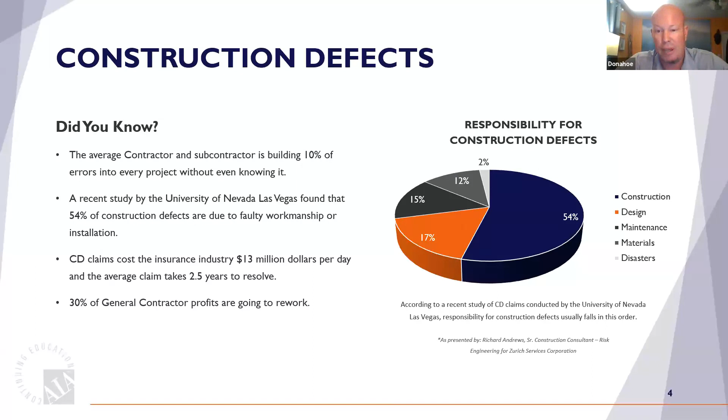So the world as a whole is trying to get leaner and more efficient at construction, and because of the COVID-19 scenarios in play across different metropolitan statistical areas in the United States, different technologies and platforms are being adopted to help flatten this curve.

Next slide. So our learning objectives today, and I have to move my little iconic imagery here.

A review of traditional photographic documentation will be teed off on quickly. We'll show what specs are kind of boilerplate and put into most of the Division I general requirements and most of the construction bid packages that go out on the street these days.

And then we're going to dive into the new stuff, new technologies and how they're being leveraged. And then we'll look at who's using these types of services. We do have a great panel today to help explore during Q&A how that's leveraged from the AEC or OAC team. Next slide.

So the traditional specification has always been included for at least the last 20 years. There's a cost, there's an allowance put in play per project to be allotted in Division I general specifications, and there's also a unit price breakout. A photographer is chosen based on their qualifications, or it's done in-house.

Sometimes, a lot of times, the specification is completely overlooked. But we are finding that now, these days, because of the ability to communicate quickly and the power of digital imagery and graphic user interfaces, these technologies are quickly coming to save us time and money in construction.

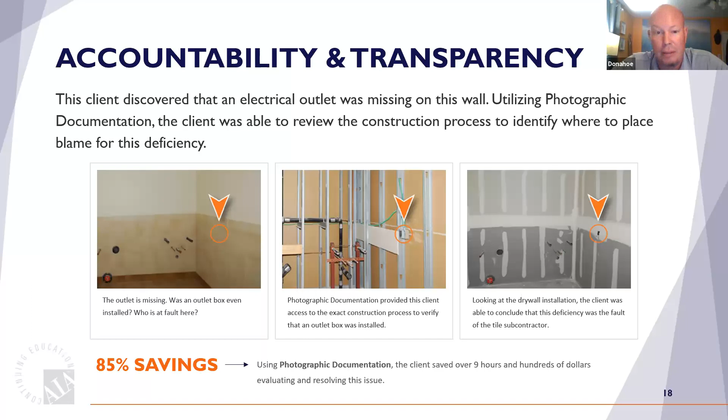So these might be arbitrary numbers, please chime in at the end, but we've put this information together over time from talking to folks in the industry. So you can read through and see hourly rates and apply those to what your firms do. Think about the amount of time spent trying to request and find information you don't have visual access to without driving to the job site or hearing from 3 to 4 or 5 people. Imagine the ability to save this kind of time by quickly coordinating and responding to situations that arise on all construction projects.

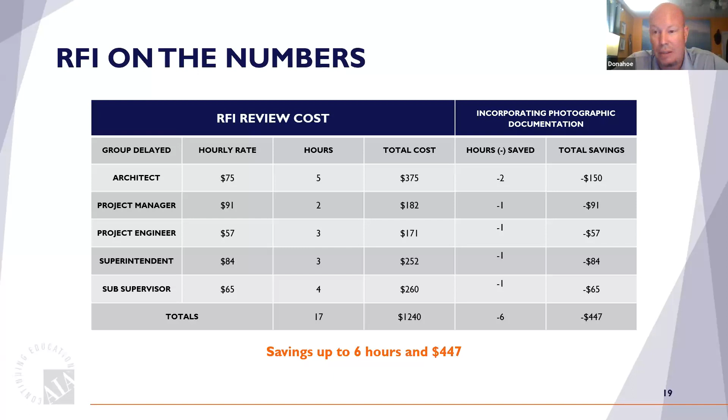Construction milestones. Capturing key construction milestones post-inspection and pre-cover-up gives you a long-standing memorialized record. It's true as-built information, not just record drawings, not updated redlined as-builts. It's true visual as-built information. These days, we're calling it reality capture.

The mechanical, electrical, and plumbing stage is a critical stage of all projects. The ebb and flow of these change constantly. Placement of material and material substitution come into question, and then rework once drywall installation goes in, or ceiling tiles are dropped, or hard ceilings are put in place—especially on the interior sides of busier facilities like hospitals, laboratories, and Department of Defense or government related projects. This is very critical, but for the life cycle, for the people that inherit this asset, someone can walk into this project from an ownership or facility management side, pull out their smartphone, click through imagery, and be there back in time as if they were there the day it was built.

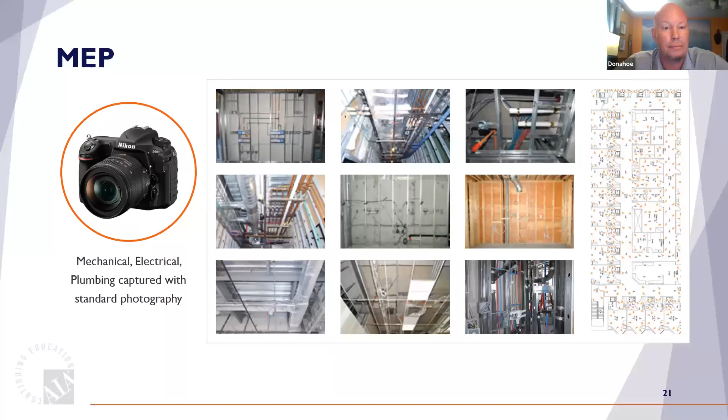Immersive technologies—immersive is like the BIM word. Building information modeling means about 1 million different things. Well, immersive technologies are scanning equipment, whether photographic or laser scanning, and it's constantly updating and changing. This is moving into the world of supplementing the photography. The resolution is getting better, the metadata is getting better, it's getting easier to capture. Takeoff data is getting easier to measure and share in terms of point cloud information that hides behind the image. This is really a big part of the emerging world of technology we're talking about.

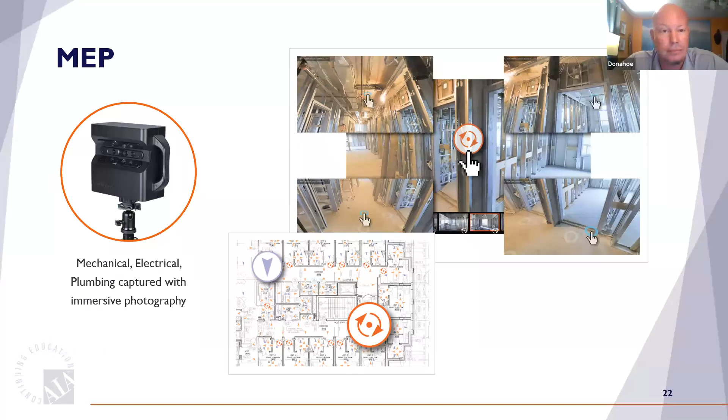So we kind of hit on all these. The MEP work—just to be able to instantly know what you got, where it went, where the materials were placed over time, how it was put together, but also for future renovations and additions onto a design team that I'm speaking to today. If you could walk into a room or space and know that entire space that's concealed, and you have to do a renovation, then your need for not knowing if the as-built information is accurate according to drawings is easily overcome by being able to visually see where everything is—just taking off the drywall, the insulation, the ceiling tiles or hard ceilings, even the outdoor utilities, the connection points—just see that visually and make quick decisions on future renovations and additions.

Next slide. Pre-slab concrete work is always something that if there is a hiccup or a change order, pulling in X-ray equipment to do some kind of coring or modification post-pour is time-consuming, expensive, and usually happens after hours. With traditional overlapping photography in the new era of photographic tech, you could at least make a decision based on this imagery tied to your floor plan of where what is. In the advent of new tech emerging, there's actually measurable photography now that can tell you exactly where something is, so you can step away from the old world of having to X-ray for coring or checking structural integrity of your slabs.

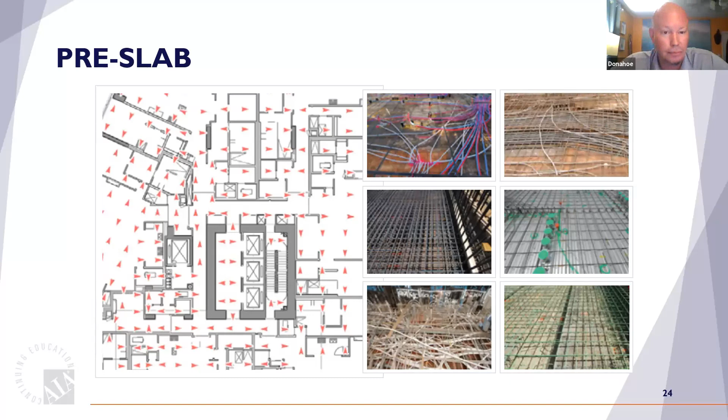So one thing for sure—and a lot of concrete companies like the accountability here too—is just the oversight to placement of rebar and waterproofing. This really helps validate and save the project lots of money down the road, especially if you can control it and correct it during construction while the folks are there on site.

UAVs, drones—they're amazing. The ability to capture visual information related to every element of your project. You can do easy mosaic mapping now, creating a three-dimensional model you can plug into your design software packages, dropping the design into a landscape you haven't yet built or got approval to go vertical with. But it's also leveraged daily. Instead of just a boots-on-the-ground photographer taking overlapping pictures, you can document anything above 4 stories, look straight in the window, monitor elevations and waterproofing details, do roof inspections during construction and at completion, and civil site studies measuring very accurate data of cut and fill and other relevant aspects of yard pipe and utility runs.

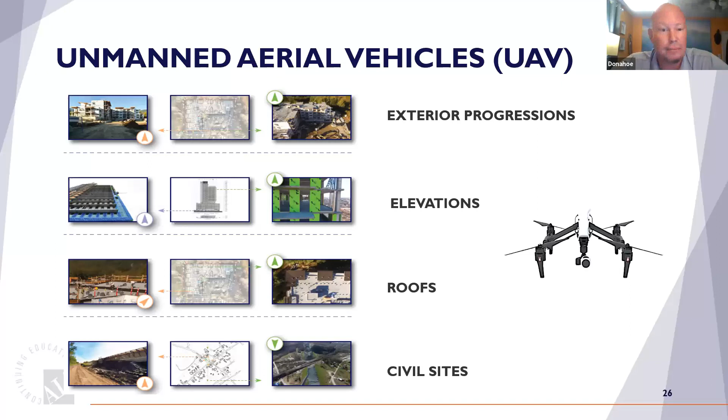So I'm speaking to the benefits as we look at this imagery. Everybody's fascinated with UAVs. There are a lot of folks out there still wild-westing it, flying illegally, and there are liabilities associated with that for both owner and GC. But drones are definitely a technology that's here now. They capture far more information than going up in a helicopter or a Cessna to do monthly flyovers, improving safety and minimizing risk for inspections during and after construction, like curtain wall or waterproofing installations. Not as many people have to hang over the side of a building anymore to do these kinds of inspections.

Here's a great example, I believe this building is 12 to 14 stories tall. You can digitally zoom into these images, and this is a static slide, but you can see the sequence of images across the bottom showing how the waterproofing is in play. You can zoom all the way into the corner of those windows and see a hairline crack. The power of the UAV world is here, and it's proving very valuable.

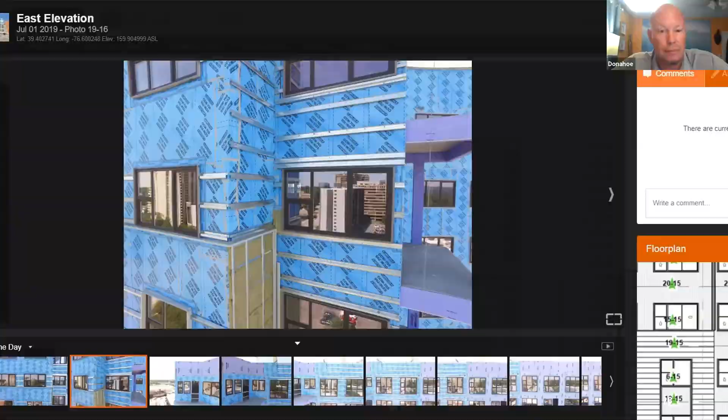There's also the ability to zoom in, whether you want to inspect a roof or take a look at utility runs now or in the future once they're covered up. The measurable data is very accurate—you can get accuracy within a few millimeters depending on the drone's flight path. The sequence of images below are all navigable. You can mark these images up, share them, and use them across your entire project team.

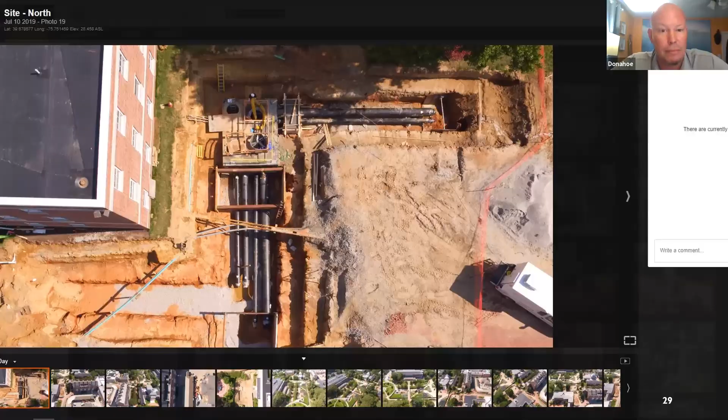I touched on this a few seconds ago—the three-dimensional world captured from the same flight. While the bird's in the sky, there's so much visual metadata that can be captured, it's absolutely amazing. You can zoom all the way in on this. This is reality capture from a drone UAV perspective, showing the landscape of this hospital, I believe. You can zoom around, spin it on top, and even drop it into Revit or Navisworks and plug in your add-on building to see how it would look across the landscape.

Webcams are everywhere now—you can't drive down a street without seeing one. In construction, they're most notably great for tracking overall progress, and the technology keeps getting better. You can read a license plate from 100 yards with some of the tech out there these days. You can make this very shareable, and also mark up and annotate these images with call-outs.

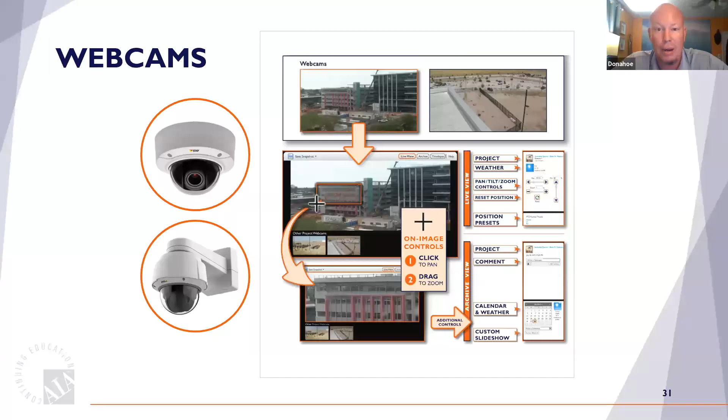With some of the new cameras out there, you get the power of one camera that would otherwise take four cameras to capture the visual information needed for different archival areas of your project coming together.

Real-time oversight lets you look at this on your phone these days and see a live feed. It's obviously a great marketing tool, edited at the end—you see this in a lot of offices showing their projects coming together. It's also a great way to capture historical data, especially for project overruns. If you have a 16-month project that went 24 months and want to go back in time, this will tell you a lot.

One thing that's really evolved in the visual world, because of the ability to condense data, is understanding—especially for facility management and vendor training. Having a third party come in and do it is a huge benefit to the owner, because all this information can be saved in the cloud. A facility management team member can pull up an edited, chaptered file on a specific piece of equipment and learn how to use it right there on the spot while standing in front of it. That's very powerful for knowledge of how to use your assets, non-static equipment, and also for emergencies.

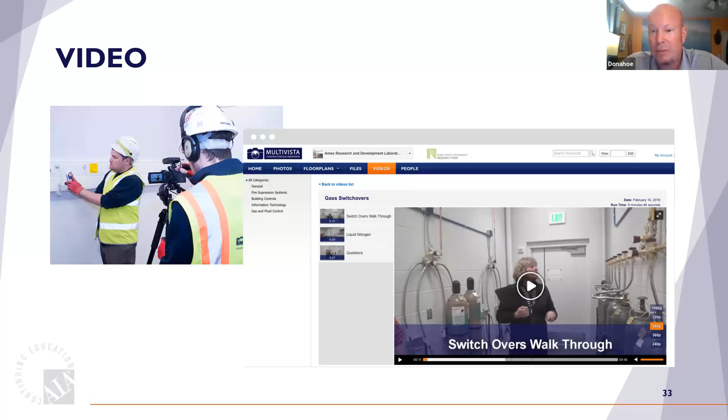So: facility management videos, training videos, overall construction videos, and inspection videos. Video information can now be condensed, saved in the cloud, and associated with a location on the drawing. Video has really changed from just being a webcam in the sky to a perfected tool for managing facilities over their life cycle.

So go ahead and look over these defects. These are the most common. This was highlighted by Zurich Risk Management several years ago. They're one of the largest insurers of construction risk in North America. But everything seems to be water related for long-term defects, whether it's water coming from the outside in or water coming from the inside and trying to make its way out.

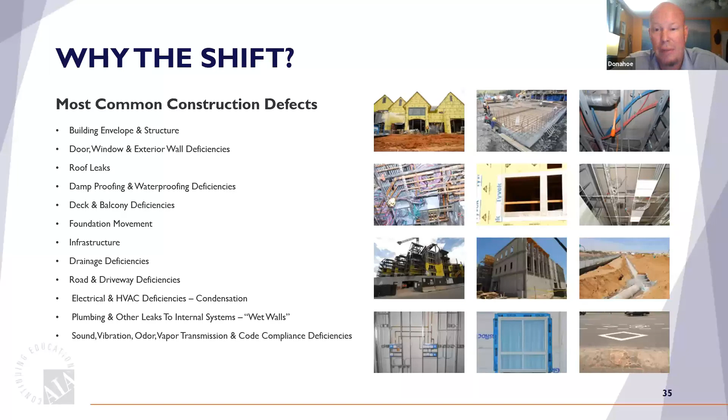We're going to show one sample here in a sequence of images how you can drill in on a non-static platform and cut the issue off at the pass, not only just by your envelope engineer using about 10% visual captures, I think, is what they capture.

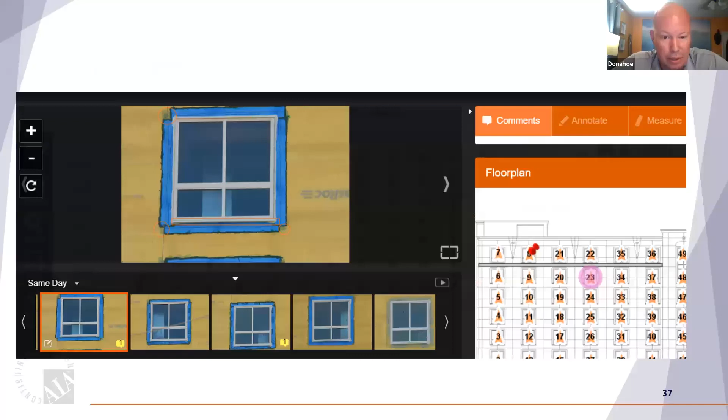Here you're going to see documentation of every single close-in on this hotel, and every single one of these arrows is pointing at a window. Someone noticed an issue here, they flagged it, and were able to mark up on the next slide where the weep holes were being filled in. If you're proactive with this kind of stuff and it's available within 6 to 24 hours, you can offset the future costs of your walls filling with water, mold infiltration, and other issues that would evolve from this.

So the new specification in photographic documentation is emerging, really focusing on an index system that's able to navigate, that you're able to navigate on the actual drawings. And it's accessible on an online interface, and it's shareable. So we're talking about continuity and data capture, visual information.

We're making sure it's shareable, and making sure that it's overlapping in detail. Everything is time-stamped by date per the old spec, but it's just a lot more visual information that's very comprehensive, which is true as-built information and what is emerging into true reality capture information.

So if you combine the inspection-grade, high resolution imagery to capture actual conditions throughout the life cycle of the project, you are capturing these milestones. You are telling the true story of the as-built conditions of your asset. And this information, again, is shareable and accessible on any kind of smart device these days. The simultaneous communication and collaboration is a game changer for cutting off defects, RFIs, verifying change orders, and lifecycle management.

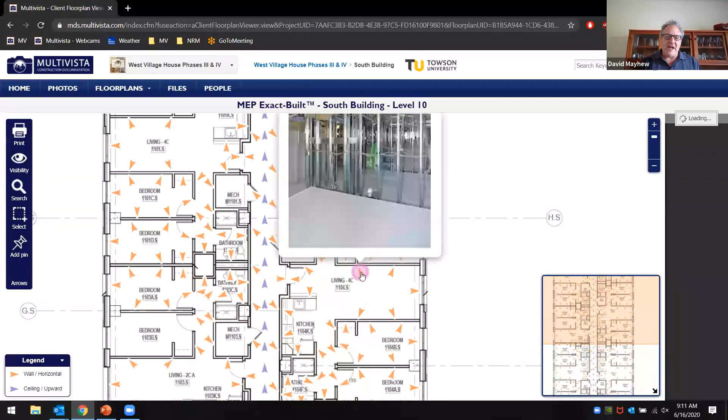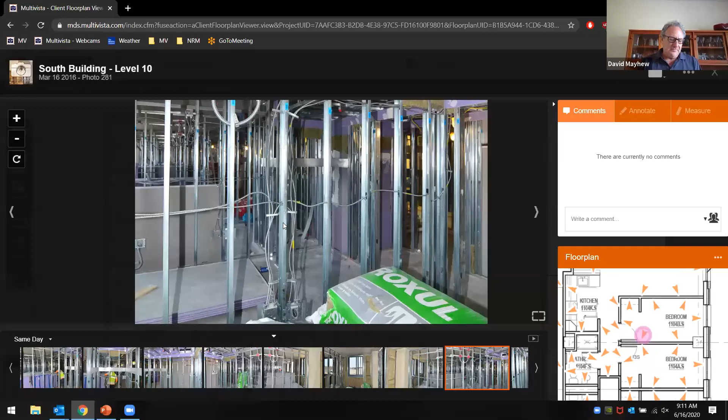Because although we have that asset, we've not really had to go back too often and look inside a wall. But as a construction administration tool, it's really been invaluable for communication and documentation. We can exchange information more readily. In today's environment, in the COVID situation where we're all working remotely and don't have access to our buildings or site, we can communicate just as effectively with photographs, looking at the same picture. We've even done virtual punch outs recently on a building using this photo documentation platform.

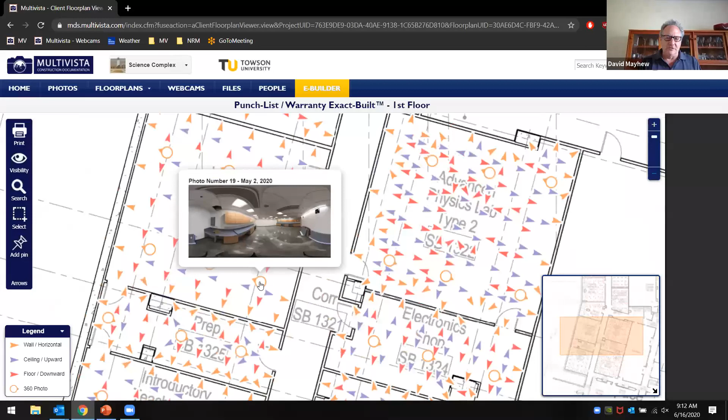Jason mentioned the new technologies of cameras, drones, and higher definition cameras, and that's all evolved. We can all practically take pictures with our phones nowadays that are adequate. But to me, the real emerging technology here has been the platform, the interface that allows you to share, exchange, document, store, and manage all of this information. Because when you're going to commit to taking thousands of pictures of your building, it's useless if you can't use it and don't have access to it.

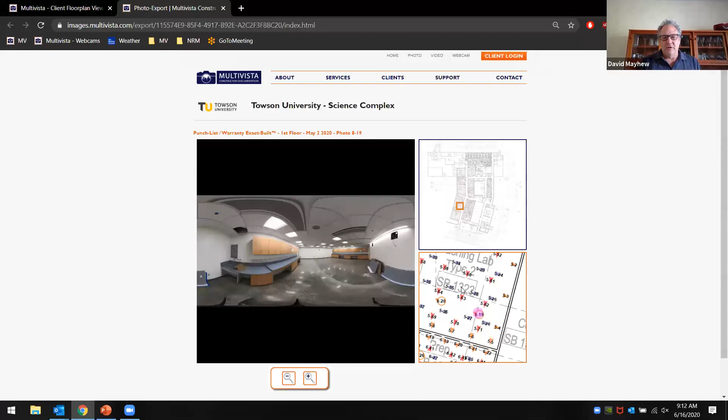We found that by having this platform, I can literally do it from my phone app, but we can generally go online, see all of our buildings and projects, click on any one of them, open it up. As Jason described, with an interface that involves all of our floor plans and site plans, we can go to any point, click on a view. We can stand at that spot and go through the job from a day-time perspective, clicking through the sequence of photos from one single spot. Or if we want to go back and visit the job site on a given day and walk around the entire site, we can set it up to do it that way.

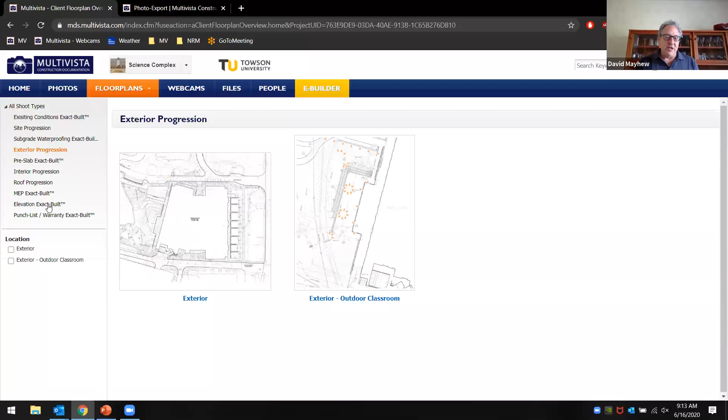And so we found this tool to just be valuable for lots of reasons. We've gone back and looked at flashing details to see if they were installed properly. We've gone through and shown progress. We've used it to communicate to executives. If we want to send a progress set of photos to somebody, or let them log on live to see a webcam, it's just a tremendous way to share information.

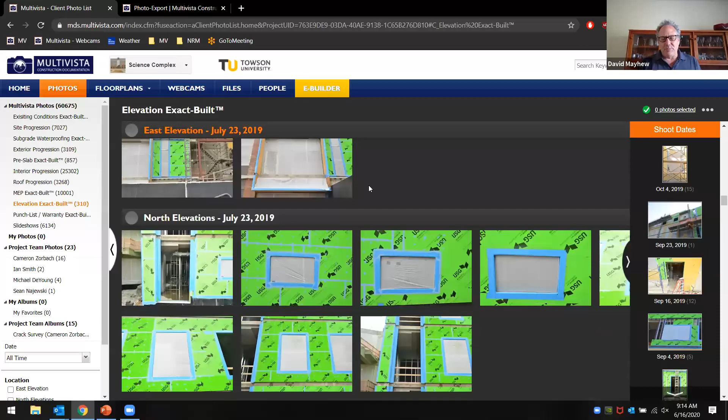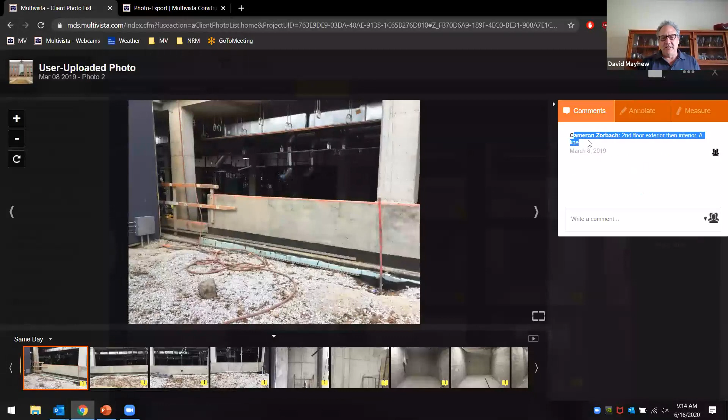Everybody can take pictures, and it's great to have a specialist who knows how to take high quality photos from the same locations, documented comprehensively and archived that way. But the other benefit of this platform is anyone on the job site can upload a photo. There are special locations for comment photos, so when the architect does his regular inspection, he no longer has to worry about capturing all the information since that's already being done. If he sees something particular he wants to note, he can take a photo and it automatically gets uploaded and archived the same way as all the others, date stamped, properly located, and available for the entire owner and construction team.

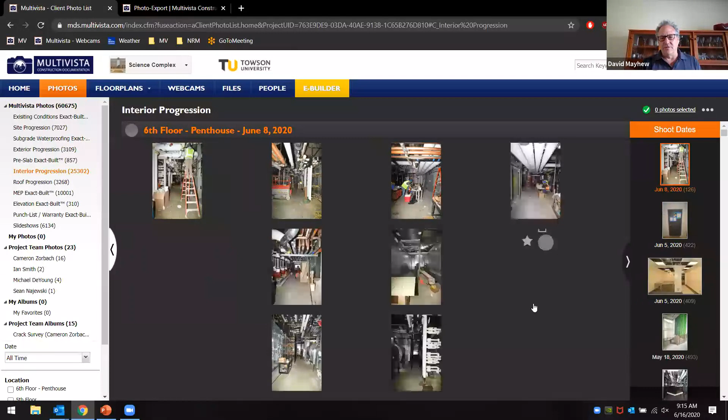That interface and communication of information is where I think the technology has really taken off. There are other platforms, like eBuilder or Newforma, that have made construction administration a lot easier and facilitated exchange of information. But a specific tool for all the photo documentation really complements that and works well with it.

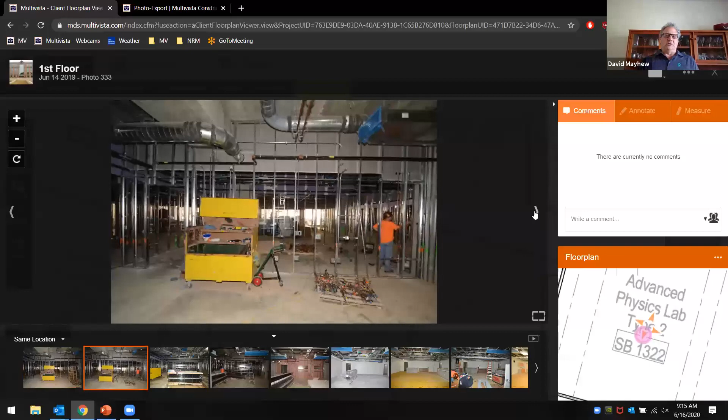When we first started investing in this, most of our construction was done with construction manager at risk, and to some extent we recognized we were paying for photographs from somebody—that scope was typically included in the CM's scope of work. We'd get the 20 progress photos a month put into the executive summary report, and the CM would go around and take appropriate pictures. He usually wasn't taking something that looked bad, that's for sure—he'd take shots that made everything look good. And it served its purpose.

But as we began to want a comprehensive archive, we said okay, we're going to do this on a building. We actually had the construction manager build it into his scope, and he contracted to provide all of this service, and that worked fine. But as we recognized this was something we'd do on all our buildings and wanted to continue doing, we realized it would be better to have the contractual relationship ourselves and maintain it across multiple projects with multiple construction managers and architects.

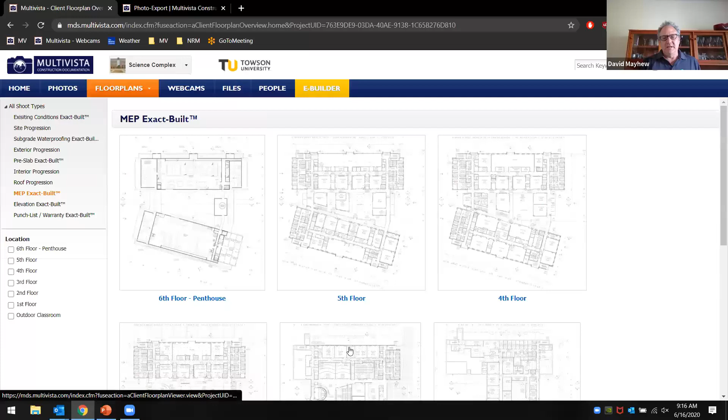Our information system would be consistent, and that's been a big benefit, because we have all these different jobs with different contractors and different scales. This way we have the same documentation, the same platform, the same interface on all of our different buildings, which is a tremendous benefit.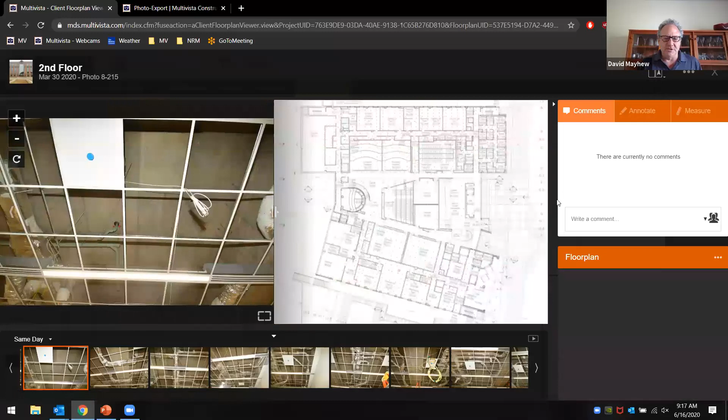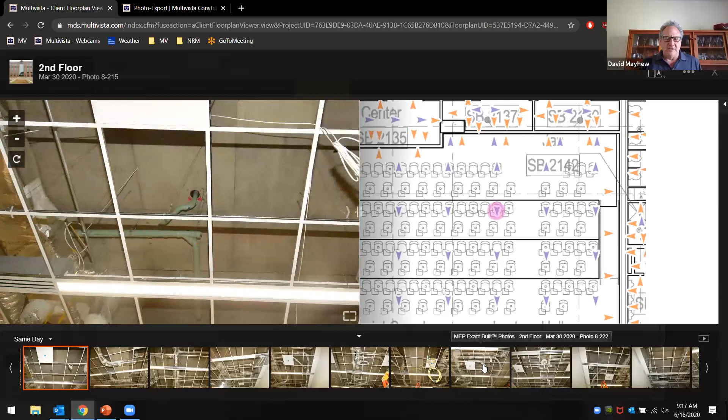We were also able to control the information. Hopefully you wouldn't have to use this in a litigious situation, but if you ever did and needed to go back to see if something was constructed properly, owning the information is a benefit. That said, I think there's flexibility—any contractual relationship could allow everybody access to the information. But we just found more and more ways to use this as time has gone on. It's the kind of thing you take for granted, construction photos, and you don't think much of it until you start to have the benefit of using it in all these ways, and it occurs to you what a real asset it truly is.

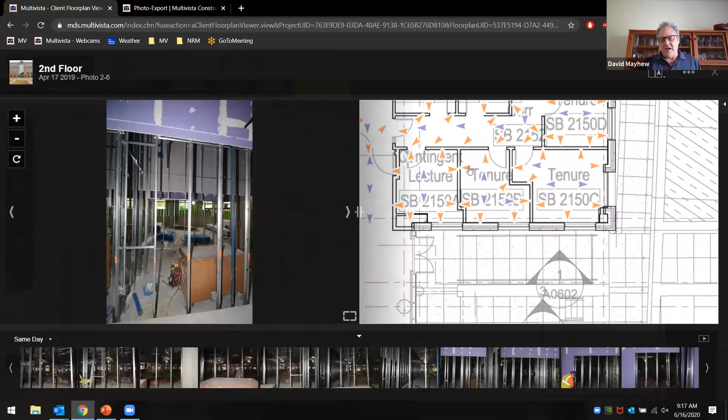The video cameras have been a tremendous marketing tool. At the end of a given job, we'll create a time lapse of the entire construction over two years, condensed down to a couple of minutes. The live webcams have allowed us to see progress, to see what's going on, and our senior administration has appreciated being able to just pull it up on their computer conveniently and take a look at what's happening on the webcam.

So these are things that if you don't know them, you don't really miss them. But once you have them, you start to realize what a benefit they really are.

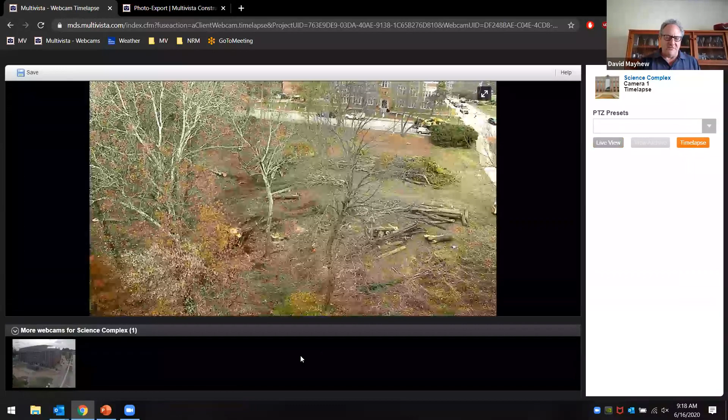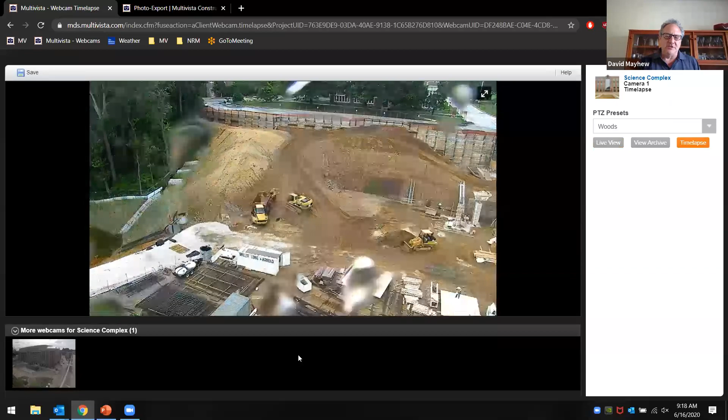I would also like to give Trey some time, and the last thing I want to say is that every job is different, and you don't necessarily need this level of comprehensive coverage on every single job, but you can tailor the scope and services to what you need. You may not need photos every month, but may want all the milestones covered. You may want a webcam and a certain level of photos—it can all be customized per the job.

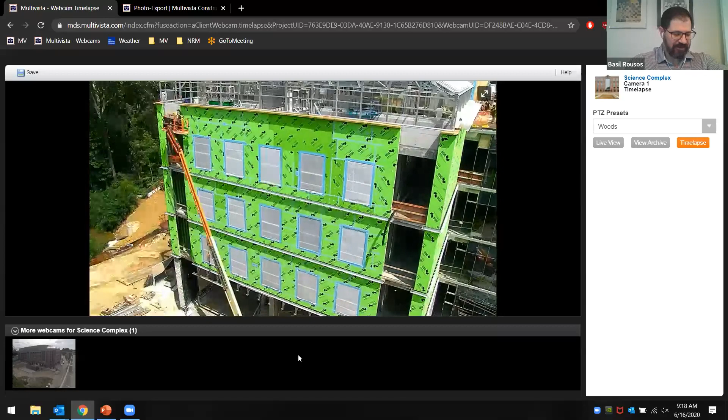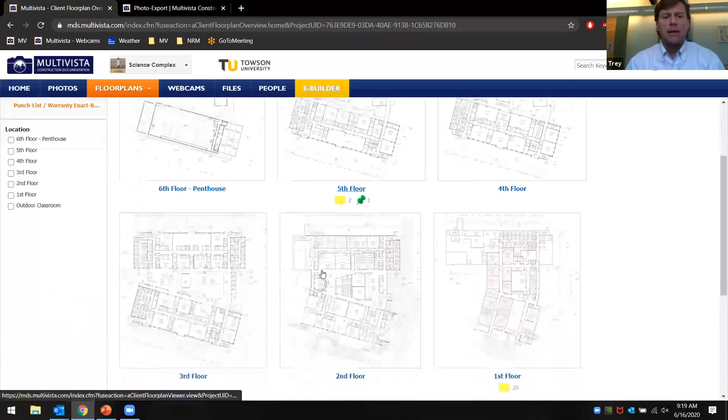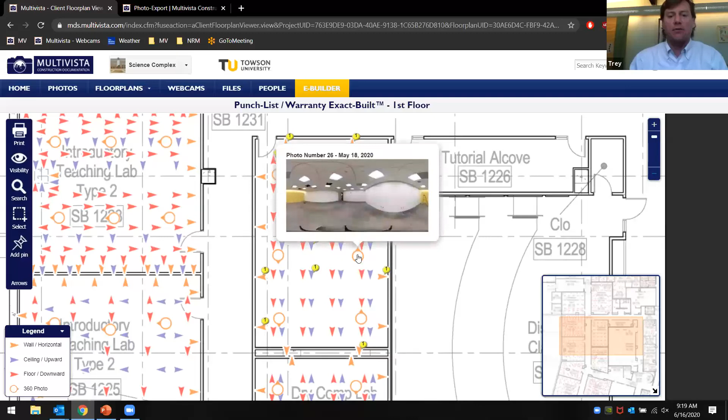We had Towson and Whiting Turner, we had Multivista involved earlier in the project to do the photographs David was talking about. But when the COVID-19 pandemic hit, Whiting Turner, the architect, and the owner were no longer coming to the site, and we're at the part of the project where we have to start doing punch out. In the past you needed to be on site to get close and see all the nooks and crannies, really get into the detail.

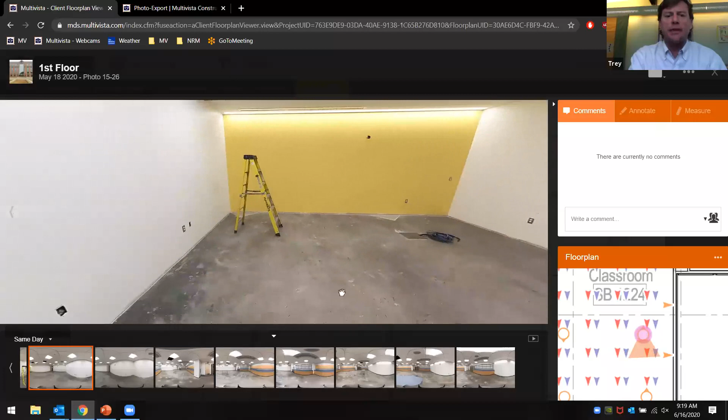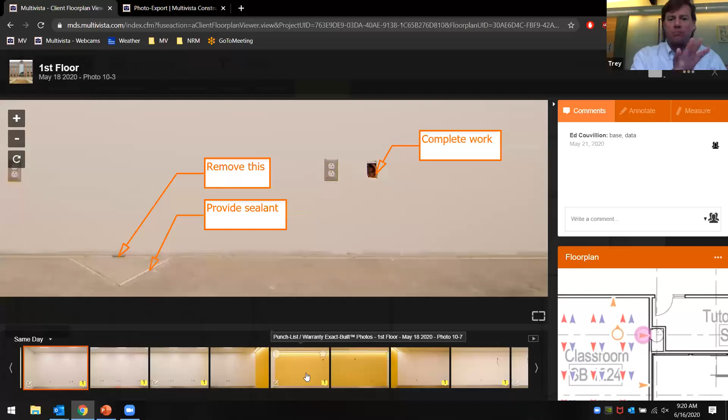Over about 6 weeks we developed a process where Multivista would have their photographer go in and take an immersive shot, a moment-in-time 360 shot. As you zoom in on these pictures you can get a pretty good level of detail. But we wanted a little more, so we also had them do SLR still photographs, so the detail was there and everybody felt comfortable they were getting a complete review. We didn't want to gloss over things, so that's really been helpful.

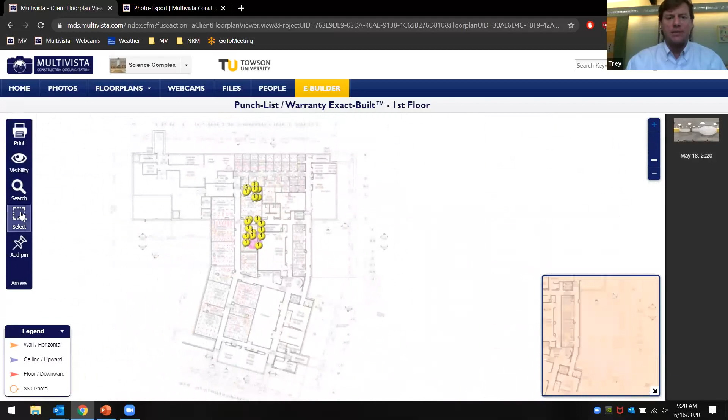The way this ended up working is we'll get a chunk of rooms ready for punch list, let Multivista know they're ready and the date, and let the architects and owner know. Multivista comes out, and like Jason said it takes about 24 hours to get everything uploaded. Then the architect has an opportunity at their leisure, when it's convenient, to look at everything in the room and really zoom in.

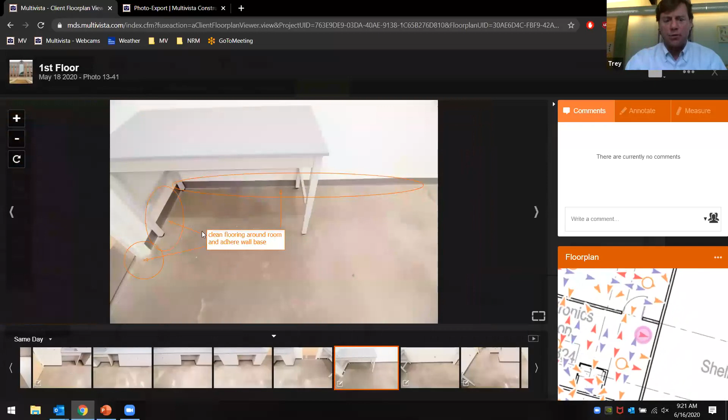We use PlanGrid for a lot of projects at Whiting Turner, including this science building. That allows the architect to take screen grabs and import these photos right into PlanGrid as a punch list item. They tag the location, the floor, the room, which wall it is. It's a really good way because in the past a lot of punch lists had long descriptions, not everything had a picture, and subcontractors would get confused about what the punch list was asking for - sometimes we got confused too.

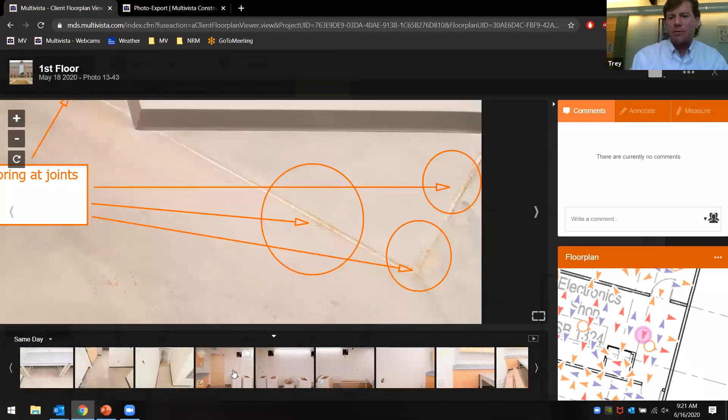This really allows for a very clear, concise, timely way so we can hit different areas on an ongoing basis, rather than having long and painful punch list walks, as I think everybody would agree those can be. It also allows for a level of documentation we've just never been able to see before.

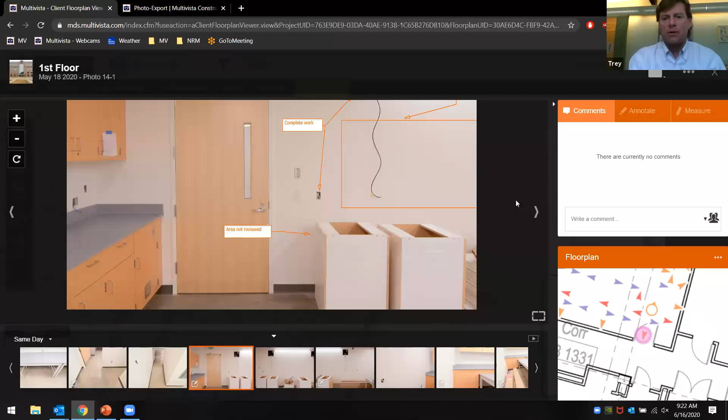The other thing I wanted to touch on is the webcam, which is valuable especially for construction, for a number of reasons. One, if you're working remotely, I can log in and pan, tilt, and zoom this camera. Unfortunately we're finishing up the facade on the south side, which is where our webcam is, but I've literally been looking online with the roofer at details, and we've also used it for security.

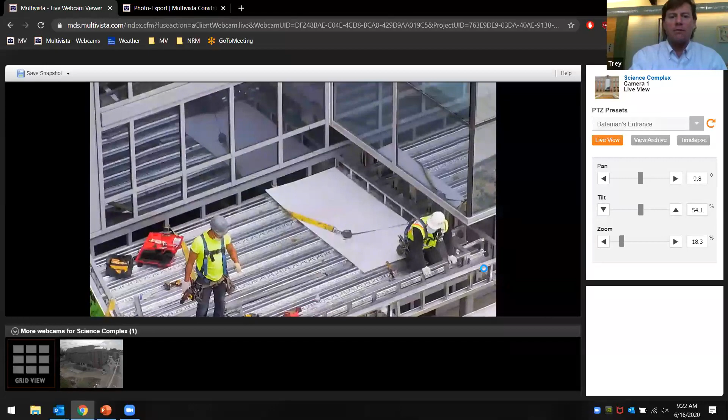It allows me to look in and see, okay, the landscaping got started, guys working on the roof of the vestibule there. So in future projects, for me anyway, I'll do my best to make sure we have not just one webcam but enough webcams to really get a picture of what's going on. And as Jason said, it's all archived, and we have the feeds.

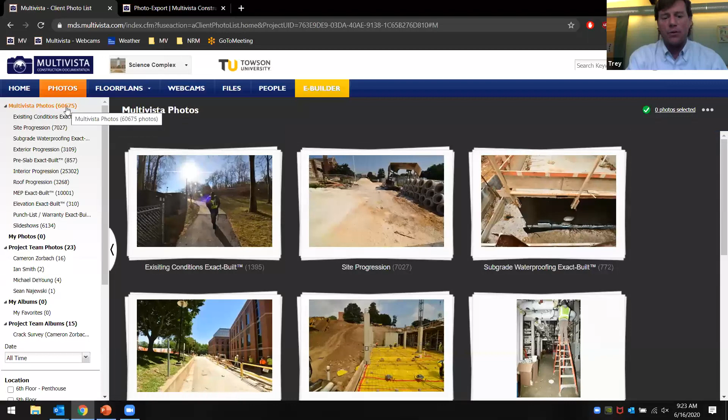Every construction job occasionally has a theft, but we've used this technology to go back and look at who's taking, for instance, a bunch of copper pipe out of the building. There are just a ton of good reasons in my mind to use this technology, and it's come so far. Like David said, the platform's nice and seamless, and it's been an invaluable tool for us. And who knows how things will progress in the future, but the way the punch list is going, it's very accurate. The subs love getting pictures of what they are supposed to be fixing. It just really makes a huge difference. And that's about it for me.

Great, thank you, Trey. Thank you, David.

We'll move on to question and answer for a few minutes. There's a few questions on the group chat. The first was about measurable data. Does this need to be set up prior to the photo being taken, or is this inherent to the nature of the photo?

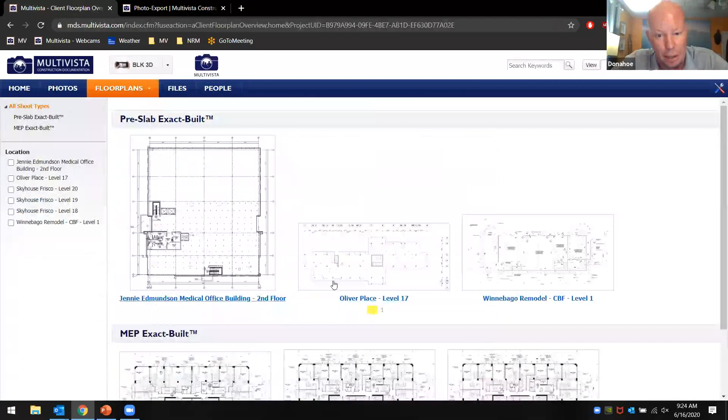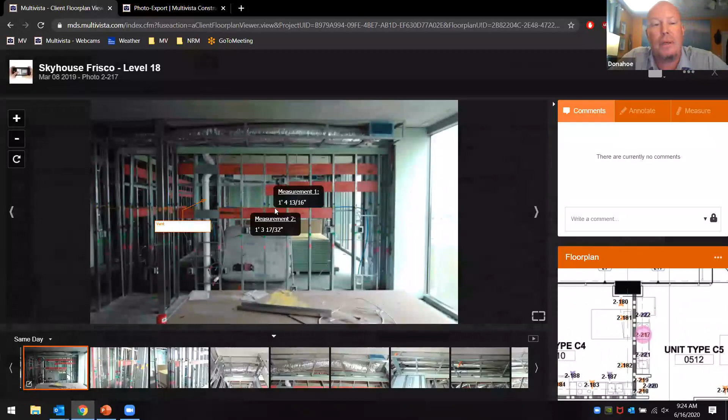My colleague Nick McNutt is showing one sample of technology that's out there right now. This is BLK 3D data. It's a camera, and it captures within a millimeter or a few millimeters accuracy. You do not need to set anything up. We can come through and capture this information on the fly during construction at critical milestones. We use it for whatever the client's driving us, and whoever the client is, we're pretty much driven top down these days—owner, GC—but now architects are really taking a look at us because of the whole COVID scenario. This measurable data, in terms of what Nick's pointing out here, is where the blocking's at and where it's located. This information is captured in the field with a camera, right before closing, so there's no pre-setup to that.

So do you have to calibrate it in order to take that measurement, or can you just literally measure with the program?

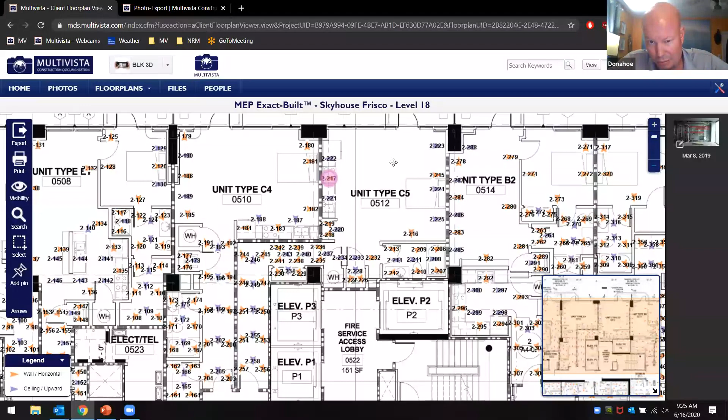So what happens is the photographer is taking 3 to 9 shots at fixed distances from 8 to 15 feet, and those images create a 3-dimensional photograph, which then calibrates the measurable data. We use it on all new slabs—this tech just came out earlier this year, so any new slab is being documented in that capacity. And if the owner, GC, or design team want that visual documentation for walls or ceilings, it can be leveraged for that too.

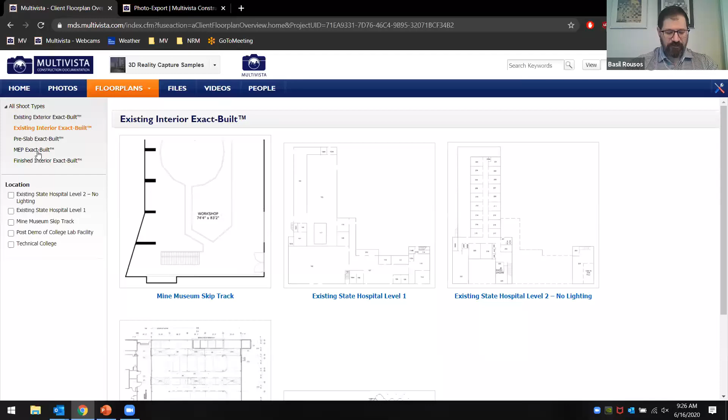The other question is, who is producing the as-built documentation? Is that something the contractor does, or a third-party architect?

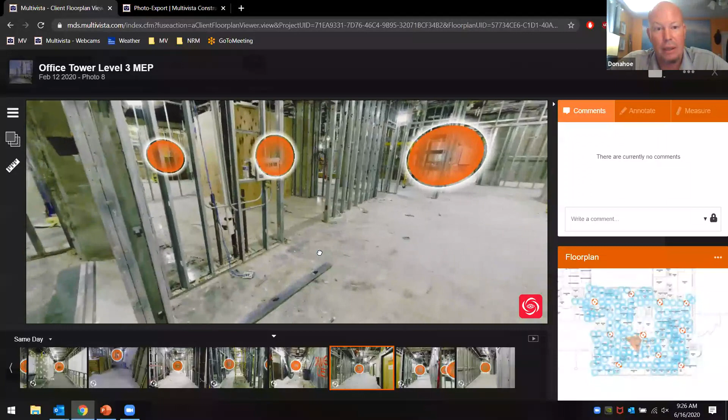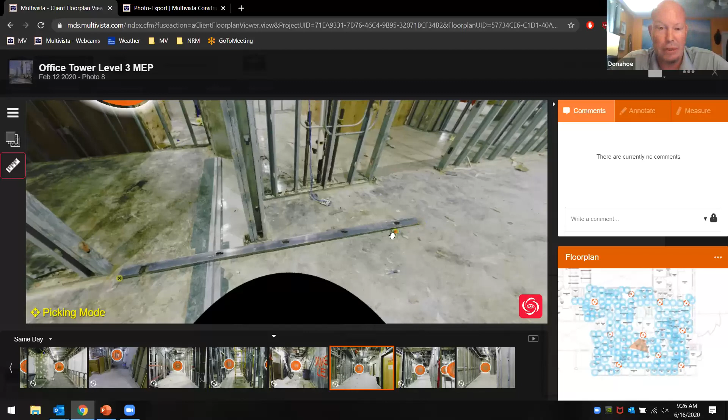If I can speak directly to the company that I'm part of, now that the credit session's over—the as-built information is captured by a trained team of third-party individuals following a pre-sequenced scope, and critical path milestones in a very comprehensive nature. They are all trained in flying drones, in the methods of overlapping measurable photography, traditional SLR photography, immersive photography, and immersive scanning. They're all armed to the teeth on every job site because there are different factors and phases that need to be captured at any given time based on the bell-shaped curve of construction scheduling. So it is a third party—it's non-biased, so that's the benefit. And it's put onto a shareable platform, if that answers the question.

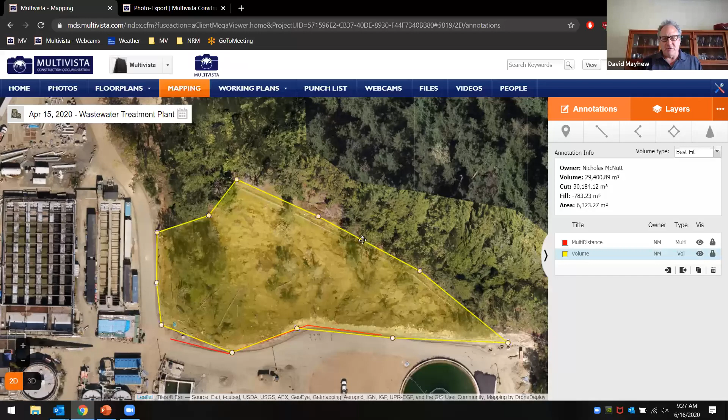I can just add from an owner's perspective that this is a supplement to traditional as-built requirements. We still have traditional as-built documentation required from the architect and contractor, but this is a tool we've all used throughout the job that becomes part of that documentation. It doesn't really change the contractual responsibility to provide as-builts from the contractor in terms of drawing updates and a set of drawings that represent the as-built conditions in the field. But this stuff is all archived on construction drawings, so the base that these photos are oriented to is done from the actual construction documents we're using to build the project. They coordinate really well with the final as-builts.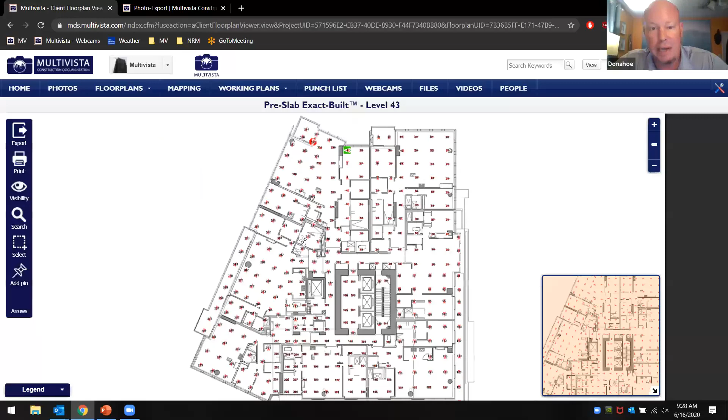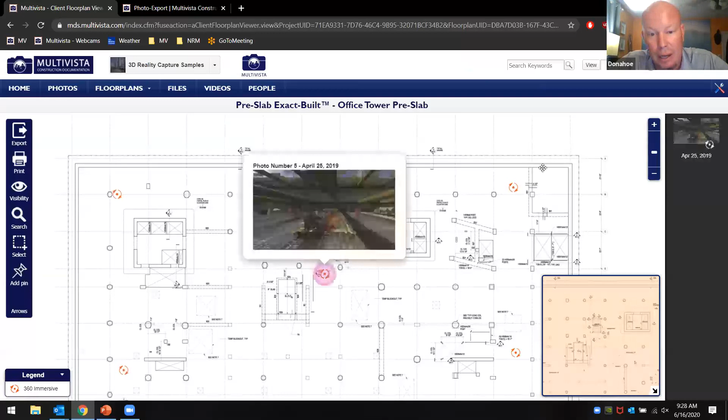Another emerging tech that's not part of the AIA presentation is Scan to Plan. That's being rolled out nationally now, where any existing space, slabs as well, can be scanned in a photographic capacity—it's laser scanning and point cloud data—and that information can be used for takeoff, and it will evolve into true as-built information from what we are calling Scan to Plan.

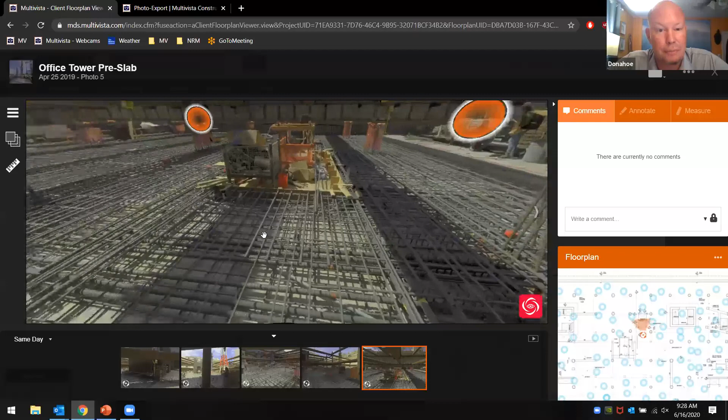Scan, plan, and measure—this is a sample of what we're talking about here. What you can do is dump this into your 3D modeling, so slabs can be documented. Existing buildings with no as-built information can be scanned, and you can visually get an existing condition knowledge of it, while also having metadata thrown into your 3D model.

This wasn't part of the AIA presentation, but we plan to circle back in a month or two and focus on a training session on scan, plan, measure, and model technology.

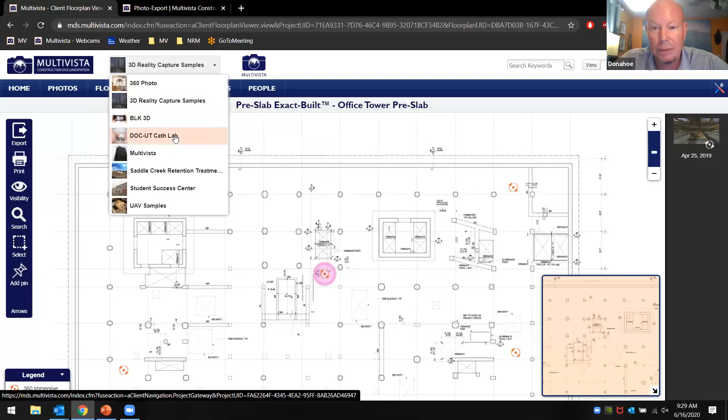Okay, real quick, two more questions. How does one specify this in Division 1? The specification has been condensed. It focuses on the interactive indexing and third-party aspects of it, and then there's a scope development section specific to the nature of the project.

I'd be happy to talk offline with everyone and share a copy of it in some capacity. We are seeing it come up more often now, and it's good because there's becoming a competitive landscape. Multivista pioneered this concept about 17 years ago, but you're seeing a competitive environment now, which is good for us because it makes it legal to not necessarily sole source, since we were the only ones doing it.

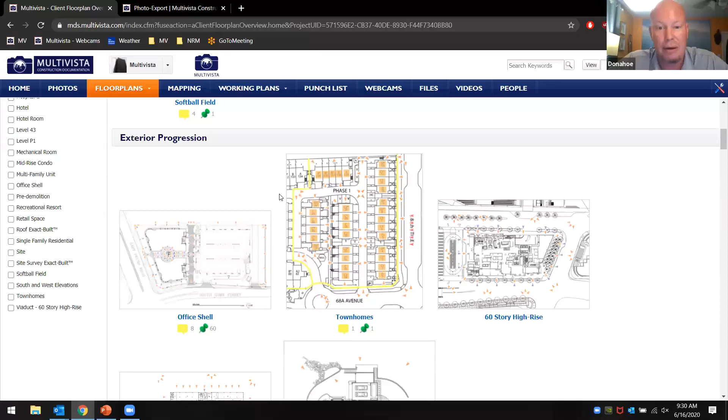Now there are other companies out there doing this type of technology, so that specification is becoming more relevant. It's out there, and I can share it with whoever needs it—it's a non-branded specification.

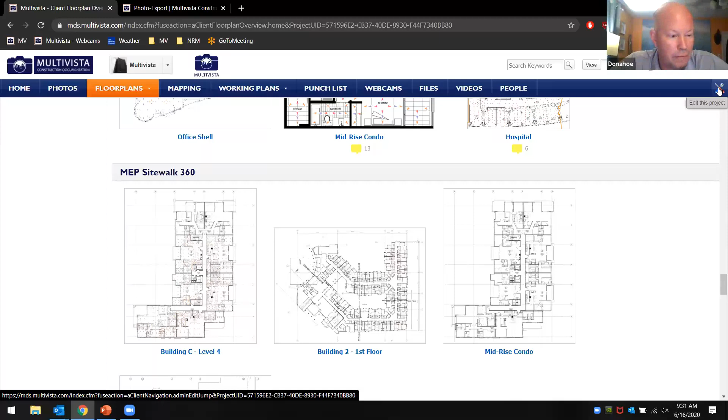And the last question is about the nature of the photos. I think you had touched on this—that anyone can take a photo and upload it to the platform, but it did appear that only the Multivista photos were scalable and measurable. Would that be accurate? No, we can provide that too.

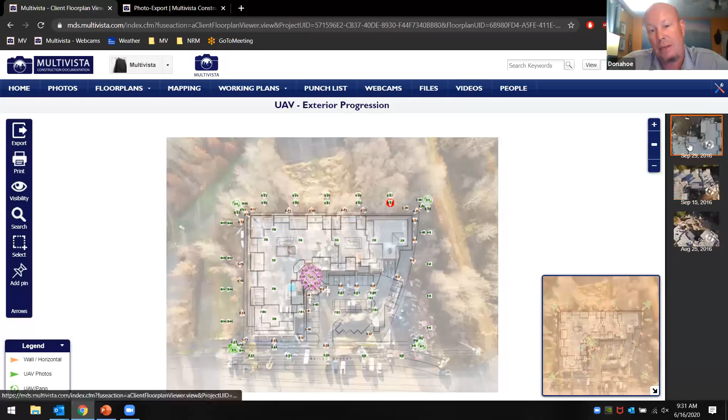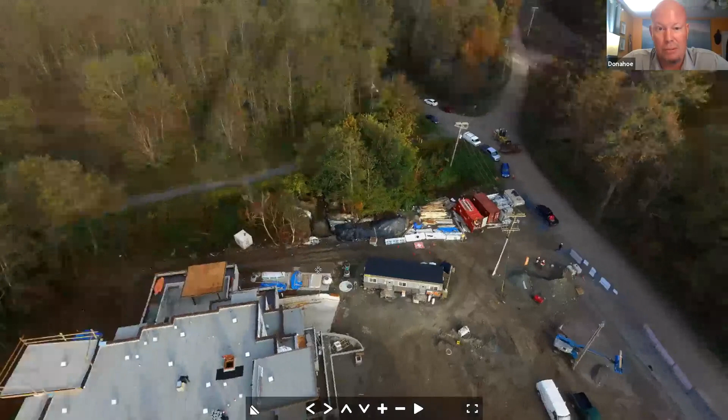What happened in August 2016 is Multivista was acquired by Hexagon AB, so Leica Geosystems is now our sister company. They are experts in developing scanning equipment based on survey, but now they have a building environment team. So in addition to us capturing high frequency visits and milestones, we also can impart and train on how to use the hardware for your team.

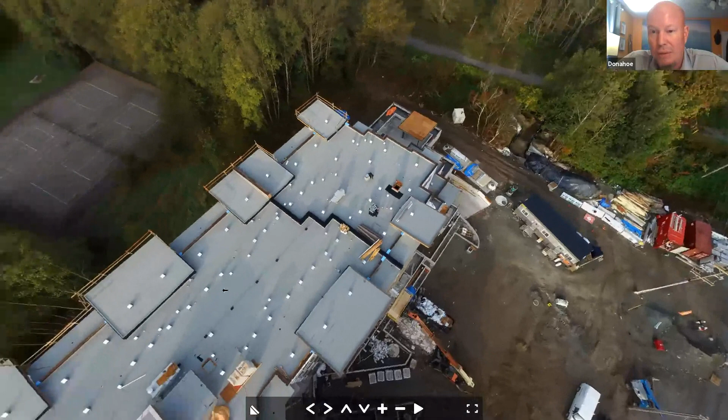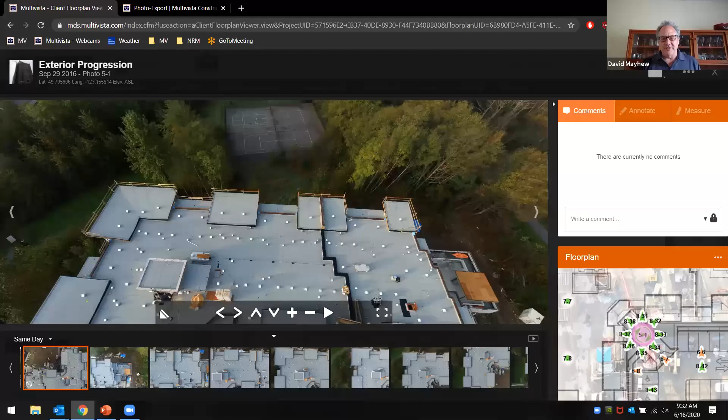But in terms of that question, I think I'm the one who mentioned anybody can take a photo and upload it to the platform. That may not be measurable or scalable, but it's just an opportunity for a variety of ways to collect information and keep it all stored in the same location and platform—just an additional part of the tool.

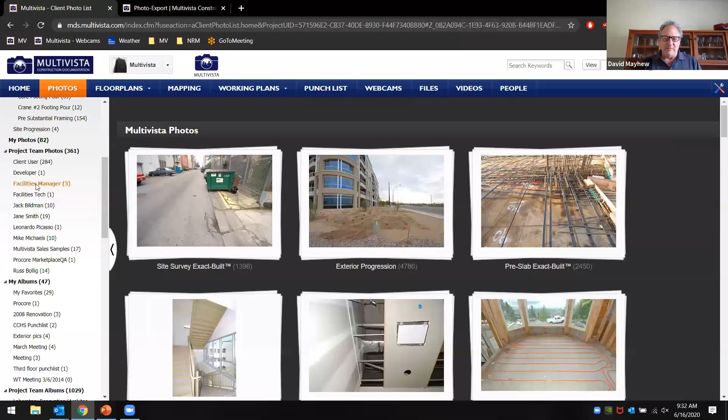If the architect wanted to call attention to something and take a very specific picture so he could ask a question about it, or share it with the team or contractor, it's just an easy way to put it into the platform and make it part of a database that everybody has access to.

The great thing about capturing a picture off the app on your smartphone is that your administrative work is done. You can take a picture of something you notice in a walkthrough and write that note in the field, and it's automatically put on the cloud, tied to the drawing. You can share it from the field, or keep it as a note to yourself. So it's very empowering, and it cuts down on admin work and office trailer time.

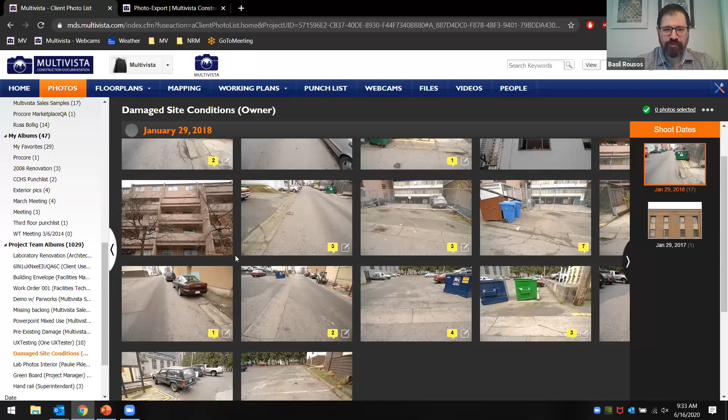Well, I hope everyone enjoyed this presentation, and appreciate this technology as a new tool, and sort of a kit of tools that the architect has at their disposal to furnish construction administration and really contract administration during construction.